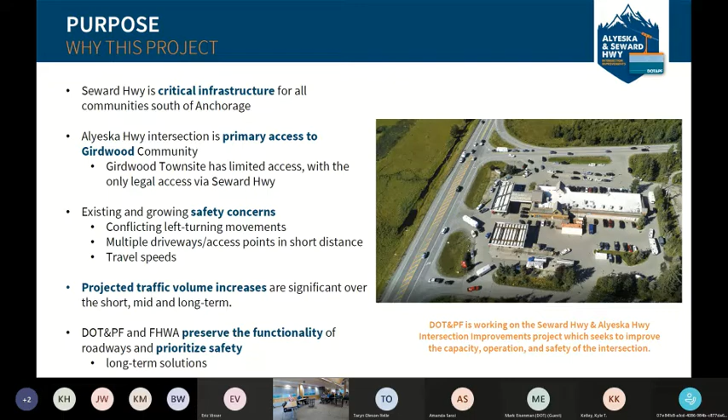We know there are safety concerns; I'm sure you've all experienced a couple of hair-raising moments at one point or another. We're aware that peak traffic volumes are very high at certain times of the year. We're here to address concerns as they exist now, recognizing that with projected population growth and projected traffic volume increases, not only here in Girdwood but throughout the entire Kenai Peninsula Borough, we're really looking for a long-term solution to this intersection.

We're also here because GBOS, as a community entity, has requested that DOT look at solutions for this project. There was a resolution passed back in 2018 requesting we dig into this and try to find a solution to address all the major conflict points we see at the existing intersection. So once again, we're here to improve the intersection—we want to work on capacity, improve its operations, and prioritize safety of that intersection above all.

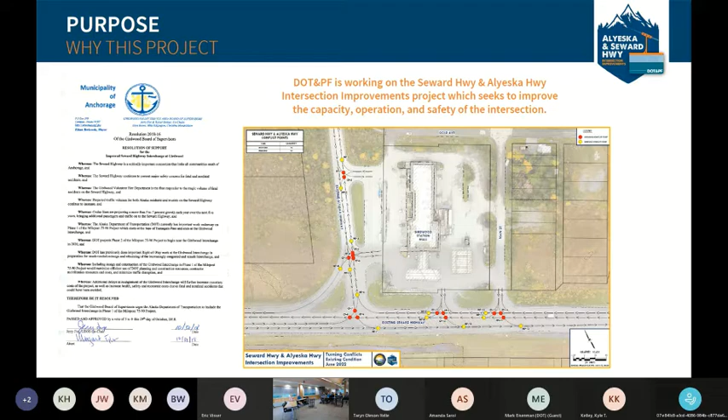Just a little bit of what we've done so far. We started this project back in August of 2020.

We've done numerous engagements and worked through an alternative development process. We've had meetings with the Girdwood Station mall owners and businesses, and some meetings specific to the old Girdwood town site neighborhood. We've been working with MOA PM&E.

We've been talking with the Alaska Trucking Association, trying to get as much information as we can throughout this process. Most recently, we had our open house in July, where we revealed our recommended concept level alternative. Over the last 2.5 years, we've worked through this 7-step process shown on the screen, starting with identifying issues and opportunities.

We knew there were safety concerns, but we wanted to learn more about what other aspects we should be prioritizing through this process, and we heard that from the community. From there, we went through an alternative development process.

We came up with really conceptual options, putting everything on the table—what could this alternative be? We presented 11 preliminary concepts in December of 2020.

We went through a pretty extensive evaluation process of those 11 alternatives and grouped them into 3 categories. One category just did not address the primary goals of the project, so it didn't meet the purpose and needs and those were eliminated.

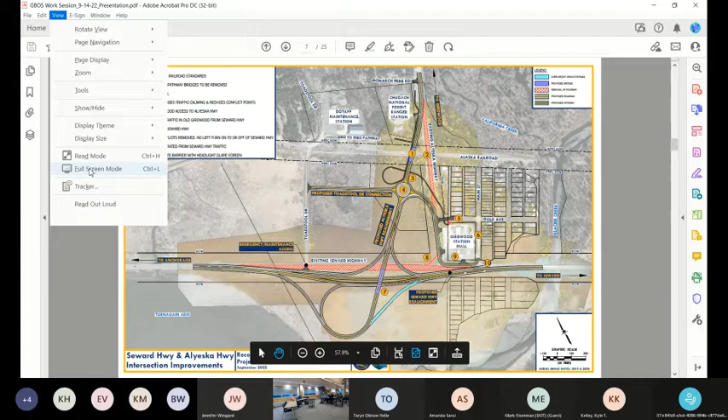I'm concerned about it, and I think other people are too, about the impact to the wetlands. That's a pretty cool place over there. How do you get around that? What's your mitigation or banking strategy, or how can you even get through that process? And if you do bank it, is it going to be in our community or in this area, or will it be banked somewhere like Arizona or something else?

Yeah, no, Guy, thank you for the question. We actually have Kristi, our environmental specialist, on the line. Kristi, do you want to field that one? Absolutely, this is Kristi McLean with R&M, Environmental Specialist.

I completely agree with you, the wetlands out there are very special and provide habitat for all the critters out there. We do understand that impacts need to be minimized and avoided wherever possible. For any unavoidable wetland impacts, we know mitigation will be required, and that's the next step in the process, permitting after the NEPA phase. But that doesn't mean we won't be coordinating and consulting with the Corps of Engineers during this whole process and the other agencies, so we'll all be working collaboratively to find the least impactful alternative.

We understand, legally and by the regulations, the Corps is only authorized to permit the least impactful alternative. So the goal behind the design is to identify the solution that has the smallest footprint, least impact, which solves the problem. We understand what's coming as far as the permitting process, and that we need to defend and justify the solution here, demonstrate that these impacts are unavoidable, and then work through mitigation.

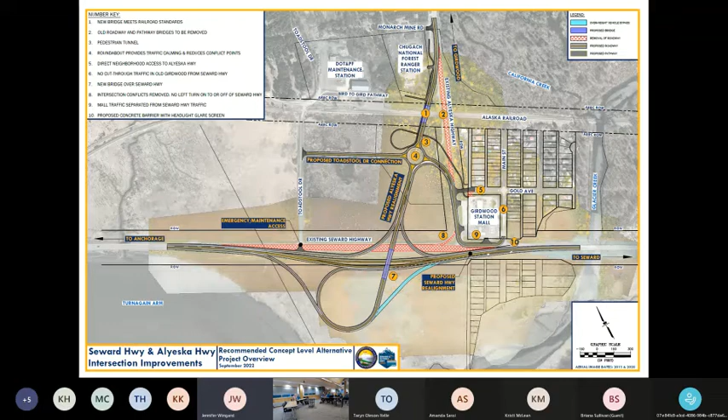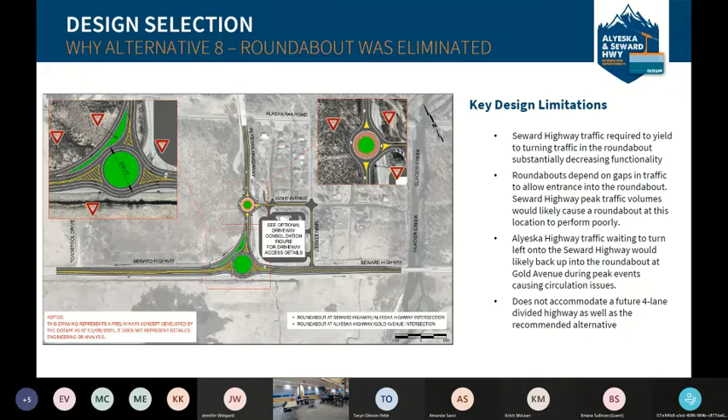There might be a lag, I apologize. Okay, if I could look at that slide for just a sec, I will screenshot that, and then I will hold my other questions like Brianna. Yeah, and sorry, I just want to apologize — we did throw this in after I sent our draft presentation over to Margaret, but we'll be sure to get this over to her to get it posted with the minutes, and we'll post this presentation to our project website as well. Thanks.

Okay, I'm going to ask a couple of questions, and then I'm going to move over to the public after that. So let's go back to the preferred design. I think I can — things I want to ask. If we're okay with some pink on it, it'll be best.

So I think I have a fundamental problem with this design, and I think it comes down to — I'm sorry, I can't remember if it was Joe or Ryan who mentioned this — I think you said one of the criteria was the navigation from highway to highway, and the area to the south of Seward Highway, so the trumpet intersection itself is exactly that. It's an intersection between the Glenn and the Parks, an intersection between two high-speed highways, but we don't have that here.

We have an intersection between a high-speed highway and a local access road into a community. So the very fact you're putting a roundabout a few hundred yards north of that seems to take away the idea that you can travel at full speed around the cloverleaf or onto the bridge. And I do not understand why that trumpet design is preferable to something closer to a tight diamond, where effectively at the off-ramp it would be going down grade, and therefore could be shorter.

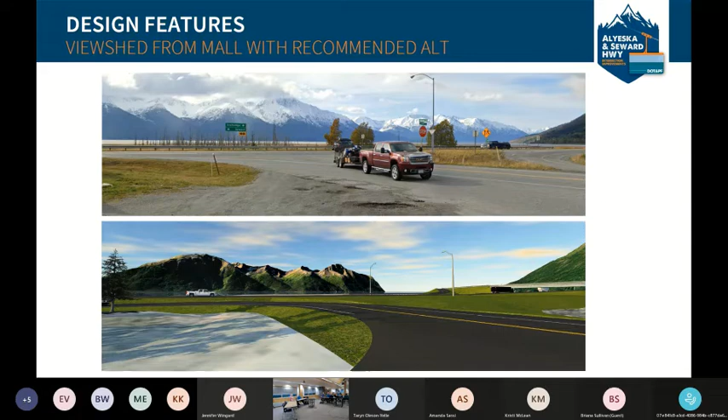We don't have the drawing here of the tight diamond, but for those who aren't familiar, basically these ramps on the lower part of the page would pull up closer to the highway, which would mean they'd have to be up at the elevation of the bridge.

When we first drew the concept, it was very tight, just a line right next to it. But if you look at that more closely, it doesn't have turning radii that trucks or buses can make, so it couldn't really be completely tight. It would have more of a footprint than that tight diamond concept.

So another thing that happens is your vehicles coming to this roundabout - say you're coming out of Girdwood, wanting to go south to Seward. Many times you'll be able to navigate this without stopping, but you are going to have to yield to traffic in that roundabout, so a certain amount of the time you'll be at speed 0 here.

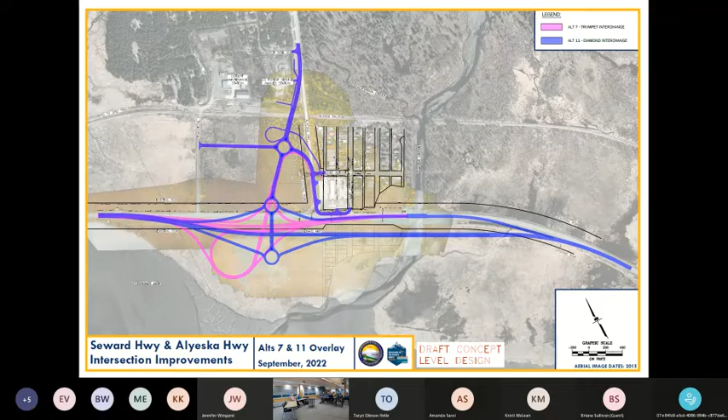The other question I had was, I've heard there is funding available for this, and potentially a plan to implement this in the relatively short term. Can you say more about that? That there is funding available potentially for this from IIJA or something, and I'd like to understand the status. You're familiar with the state-wide transportation improvement plan? Okay, there's somewhere between $30 and $35 million in the STIP plan and federal money for the construction.

So this design is now in the STIP? This design isn't in the STIP, no, it's not selected yet. But I guess I'd have to say the cost estimate is largely based on this design, and that's around 35 - but that 30 to 35 was our preliminary estimate for this.

If we change to a different alternative, the cost would most likely change, but I don't know whether up or down. So feasibly, given the timescales and different funding sources, what's a feasible implementation time on this? Our instruction from management is to build it as quickly as possible. I'd say I don't see how feasibly there could be construction before 2025.

I'm interested as to why this project is such a high priority versus others, not that I mind, I'm just trying to understand why that would be. Well, it's an excellent question.

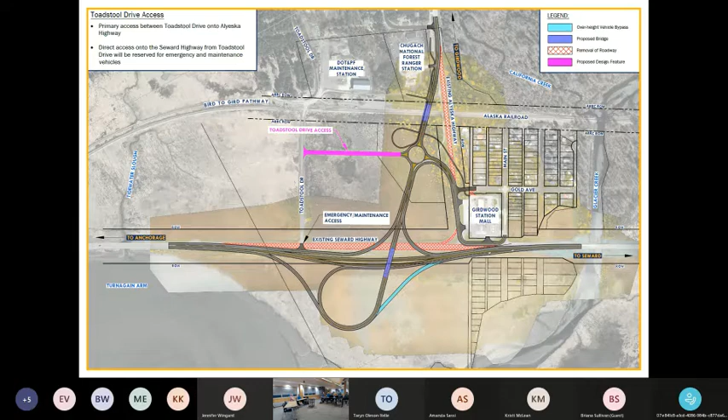I haven't heard this from the horse's mouth, but it appears pretty obvious to me that the emphasis is on the safety corridors in Central Region, because the high priority projects include this one, then the area between here and Potter's Marsh, that's a safety corridor, and an area on the Sterling Highway, also a safety corridor. That just seems to me like an emphasis on safety.

That's all the questions I had immediately, but I might have some more later. Brianna, I see your hand is back up. You have a follow-up?

Yes, real quick on that last one for the safety corridors. Some of the public feedback we received was basically the argument that other parts of the Seward Highway have more fatalities and are more dangerous, like the McHugh Creek pull-off needing maybe another lane, or things like that are already in a zone of construction, or other parts. I know the Seward Highway is always under construction, and I'll stop there for that one.

Well, it's an excellent point, and I would just say there is a separate project in the STIP to address that area of the Seward Highway.

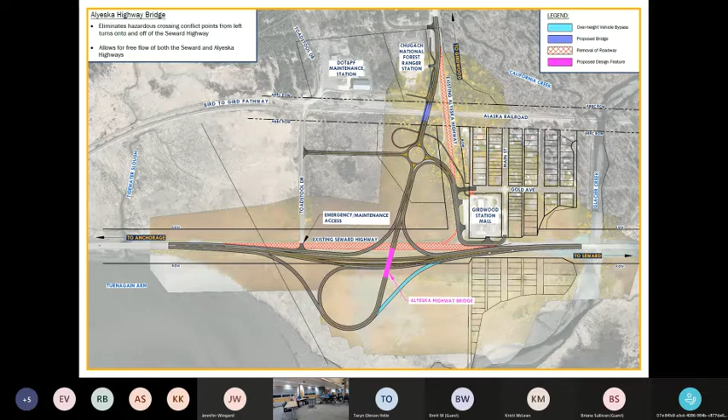So I think we'll move on to item number 3, which is more of a discussion amongst the board about a review letter being prepared by Roads and Utilities and Public Safety. I know we had started discussing having a formal statement and response to this design. I just wondered if you could give us an update on where we are. I think Jennifer was looking at this and Public Safety as well.

Are you there, Jennifer? I am. I was just going to ask Amanda if she wanted to jump in first. Sorry, I'm having trouble with my microphone. I don't know where to go from here.

We have a draft letter. If I can jump in, my sense is a lot more information was presented tonight, so if you had a draft letter, we'd probably have to rewrite quite a bit of it.

So I'm wondering if the right thing to do is for you to continue with that after this meeting and bring it back to us next week, at your regular meeting. The regular meeting, yes, next Monday. We can add that to the agenda, maybe around there. Does that work for you both? Sort of. That's good. Yeah.